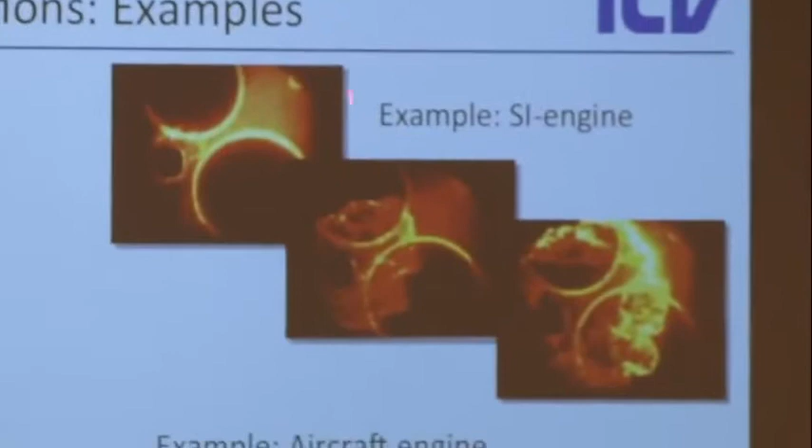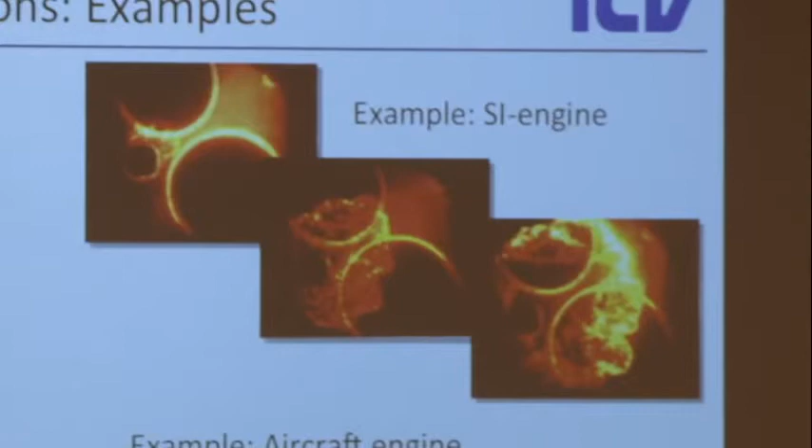You see the valves here, this is an internal combustion engine from the bottom through the piston. You look at the valves, then you have ignition, and you see a little flame kernel here that grows and just burns through the premixed charge. Another example would be a stationary gas turbine.

The other one is non-premixed combustion, where you inject the fuel, maybe in liquid or gaseous form, into an oxidizer like air or oxygen. It can only burn when it mixes, because the fuel itself doesn't burn and the air itself doesn't burn. So you have a mixing process going on with chemistry happening at the same time. A typical example is an aircraft engine, where liquid fuel, shown in green, comes in, evaporates, mixes with the air, and then burns.

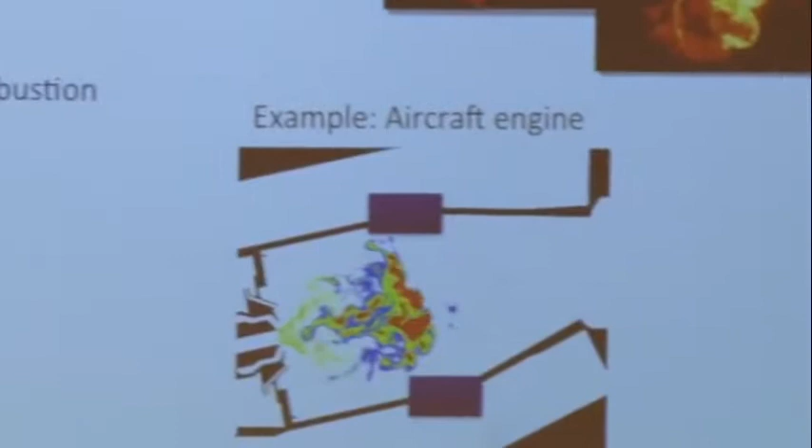The reason for this: in the spark ignition engine with premixed combustion, you have heat release very fast, and that gives good efficiency if you remember your thermodynamics course. Non-premixed combustion is very stable, it's very hard to blow out, and for an aircraft engine that's an important feature.

I want to show you how this looks like.

Unfortunately, I forgot to bring a cigarette lighter. Anyone have a cigarette lighter or matches? Good. I brought this thing here, which got me stuck at the airport. On the screen they have this thing, just in black, and they asked what it was. I said, I think it's an umbrella. They said, this is not an umbrella. So this I didn't bring, I got somebody to get this for me here.

Okay, good. I want to show you how a flame looks like.

Okay, so what do we have here? We should extinguish this. I have this tape here, and I forgot to bring fresh tape. Maybe I'll use my fingers, but then it gets awfully hot. So if I fall down and die, you should do something.

Okay, you see the nozzle is cold. It takes a while to start burning.

So now I do this, I close these holes here. Now you have just fuel, propane, coming out of this nozzle. The propane itself can't burn, it needs to mix with the air. As I said earlier, the mixing is quite slow. This is laminar here also, so mixing is very slow.

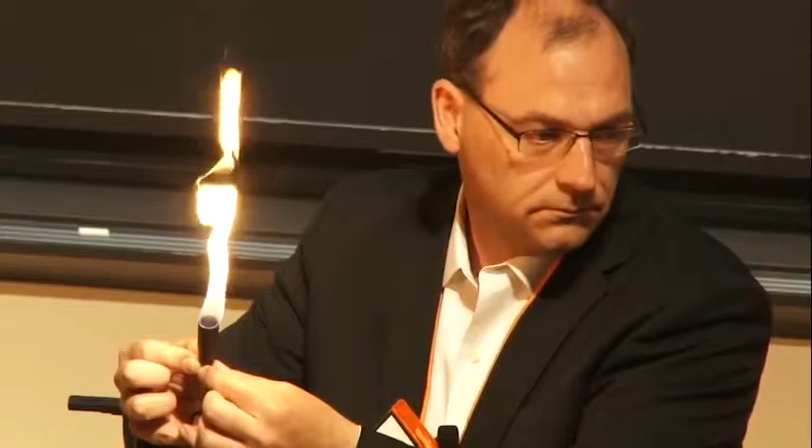No, I think it's okay. Good, or should we turn the light down? What's that? Oh, the blue. Yeah, okay, turn the light down.

So now it's all pre-mixed. You suck the air in here, it mixes with the fuel, and then, if you could turn this off here, then I could hold it in front of the blackboard. And then you see stuff coming out. First of all, you see this is not lazy anymore. This is a very vigorous flame, and it accomplishes all the heat release in a very, very small distance here.

Of course, in this case now, you also have the air that mixes in, so the total velocity coming out is much higher, it's turbulent, it mixes very fast, and you get a lot of heat release. So, the demonstration here is just, you do premixed, you do non-premixed, it's very, very different.

Exactly what we're looking at, we'll talk about later.

Thanks for the lighter, by the way. Get one of these cigarette lighters and look at it.

One thing that's very interesting, I'll focus again on this later on. You look at it, you have the same thing. It's cold on the inside, it's pure fuel. It's cold on the outside, it's pure air. It's hot only in a thin region in between where fuel and oxygen are just in the right amounts. And then what you have is a very thin flame.

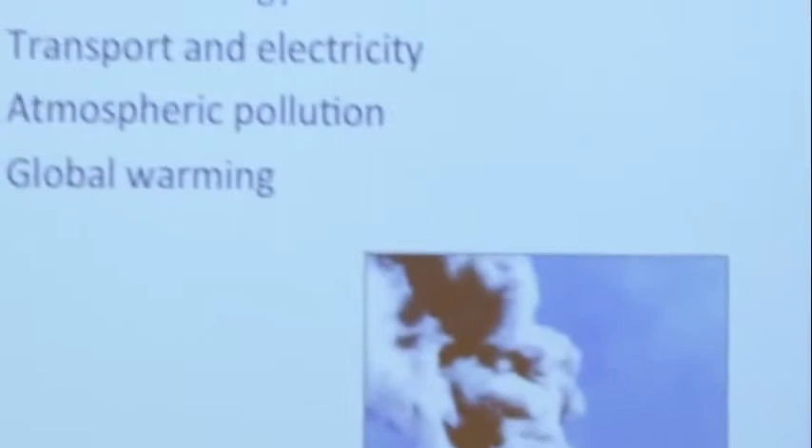Now, pollution, outside of just thinking of CO2, is still an important issue, and sometimes this is forgotten these days a little bit.

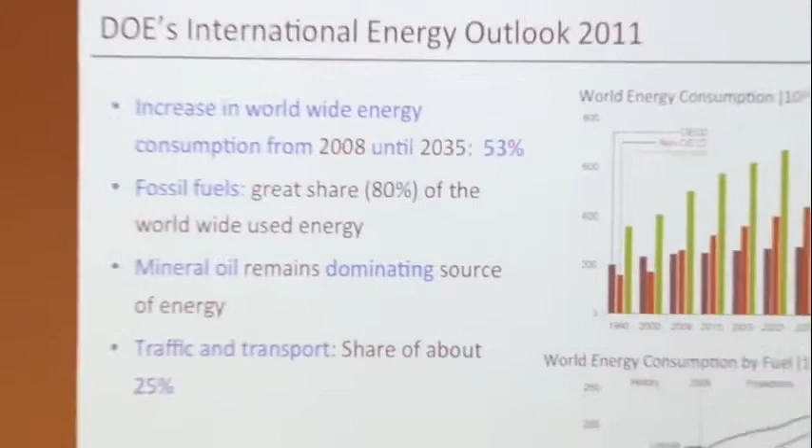These you have seen. This is an old graphic from the 2011 International Energy Outlook, but things haven't changed very much. What you see is that total demand for energy increases from 2008 to 2035 by 50%. This is a lot. OECD countries don't change very much. It's mostly non-OECD countries that are responsible for this, basically India and China. This is not to say that people there are bad, it's just that OECD countries already use so much energy that you don't need to increase it even more.

Demand is coming up in the next years, and oil is the dominating source of energy. Transport and traffic accounts for about 25%. You see this here is the world energy consumption, projected world energy consumption. Liquids here is oil basically, coal, natural gas, renewables, nuclear. Renewable is wind, water, solar, and all of this.

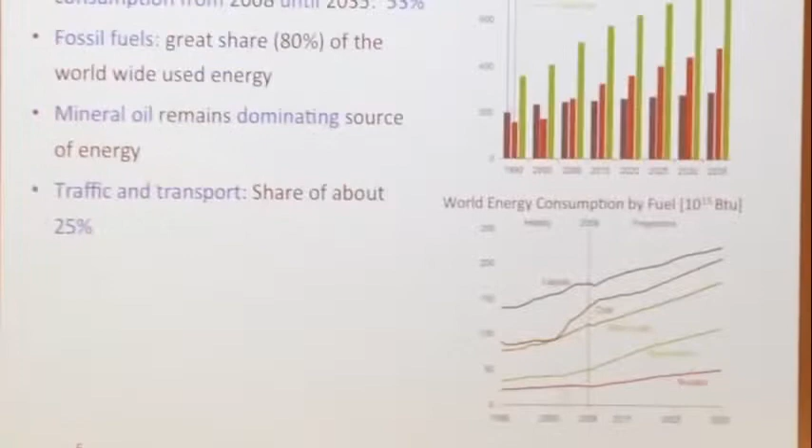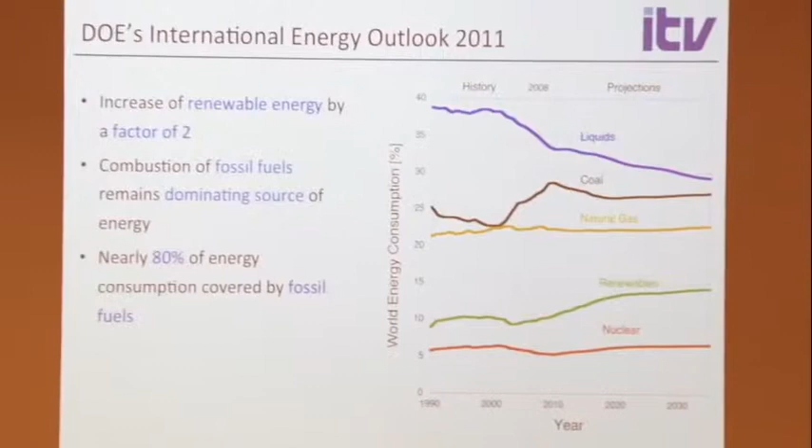So this is the exact same data, just absolute numbers. This here is in percent, and you see that the demand for liquids goes a little down. Coal stays roughly the same, and coal is particularly bad in terms of CO2, as you know. Natural gas stays about the same. Renewables, and that's important, will increase a little bit, but not very much—let's say a factor of 2 or so in the next 30 years. But a factor of 2 is not very much, it's not going to change how things are done.

You see, you have to add these up—these are all fossil fuels. If you take renewables and nuclear together, you end up at about 20% of the total share in 2035. Maybe the new reports are a little different, but that's the basic message. Nuclear here is even before Fukushima, so this might even be less at the end of the day.

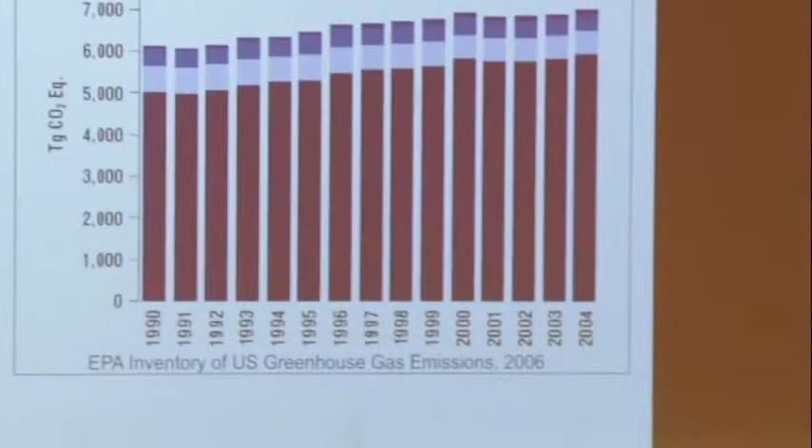So the message of this is we will need more energy. That energy will be supplied by burning fossil fuels. Now we can see, does that have anything to do with CO2, with global warming?

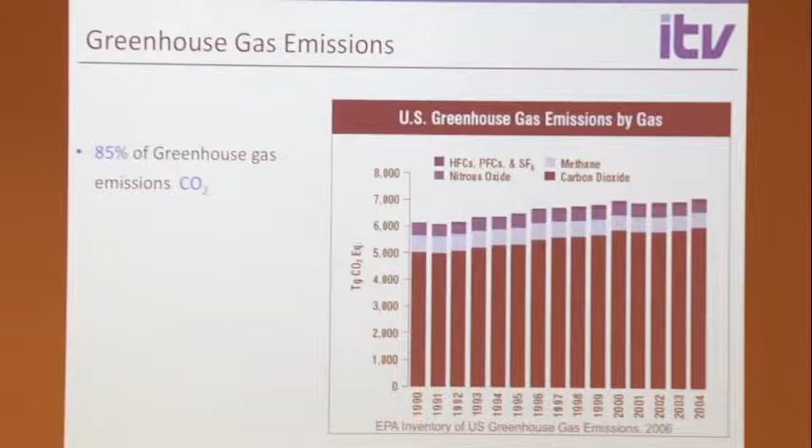Greenhouse gases—there are different greenhouse gases. You see nitrous oxide, methane, and most of all carbon dioxide. You can convert them all back to CO2 equivalent, and combustion, CO2 is responsible for about 85% of all the greenhouse gas emissions. So basically greenhouse gas emissions are mostly CO2.

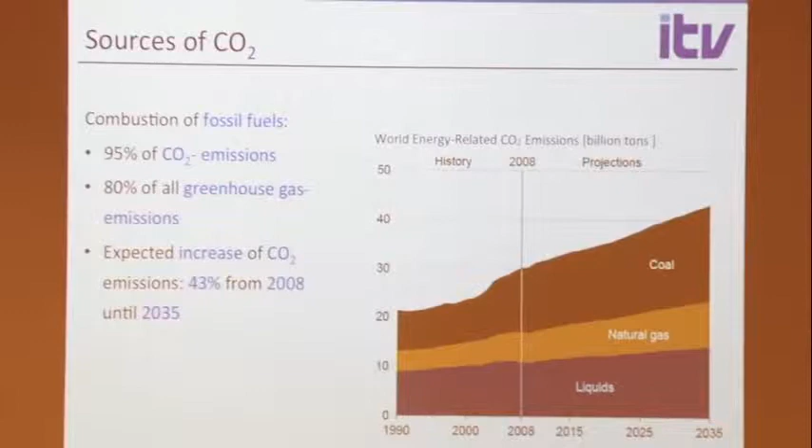Where does the CO2 come from? There are different sources of how we generate CO2 in the world. 95% of all of this is combustion, so combustion is responsible for 80% of all the greenhouse gas emissions. The expected increase in CO2 emissions is 43% again in this time span, because we use a lot more coal in that time, and again coal is particularly bad.

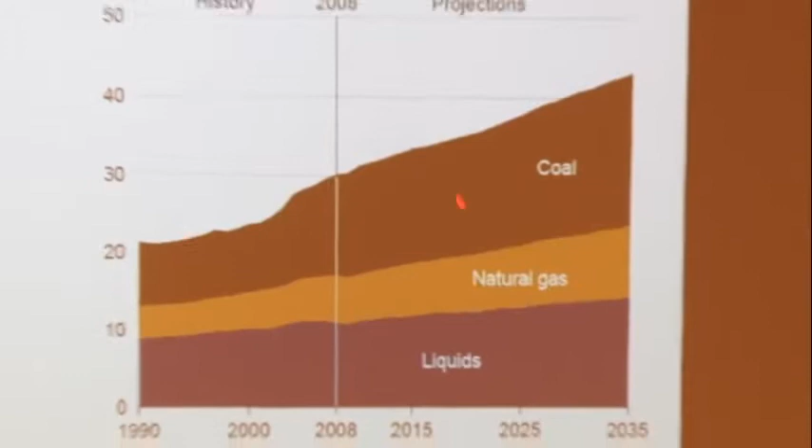So what can we do about this? There are different things. Maybe hydrogen economy, no CO2. CO2 sequestration, carbon capture and storage, is another alternative. The question is always how to collect the CO2 from combustion, but then where do you put it? You need to dig it into somebody's backyard, and that's an issue.

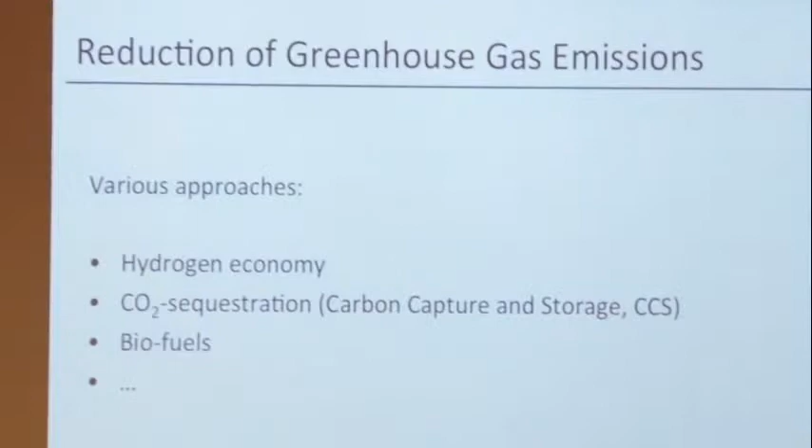Biofuels are another interesting alternative. The real problem with biofuels is there's not enough land to grow them. But what's very interesting about biofuels is that you can have even a negative CO2 balance.

You can, if you grow biofuels, burn them, and combine it with carbon capture and storage, have negative net CO2 emissions. You just take CO2 out of the environment. So these are things one could think about.

The point is there will not be a silver bullet, one thing that solves the whole problem. But there might be many little things. If you have one technology, say biofuels, that replaces 5% of energy demand, and you have 20 of these, then everything's good. Maybe 5% solar, 5% wind, 5% water. Add all these up, and maybe you get to 100% at some point.

Increasing efficiency is one important approach, and combustion theory can help with that — that's the point I wanted to make here. Increasing efficiency is not easy. You take a combustion device and want to increase efficiency, but you'll see there are other aspects you have to consider.

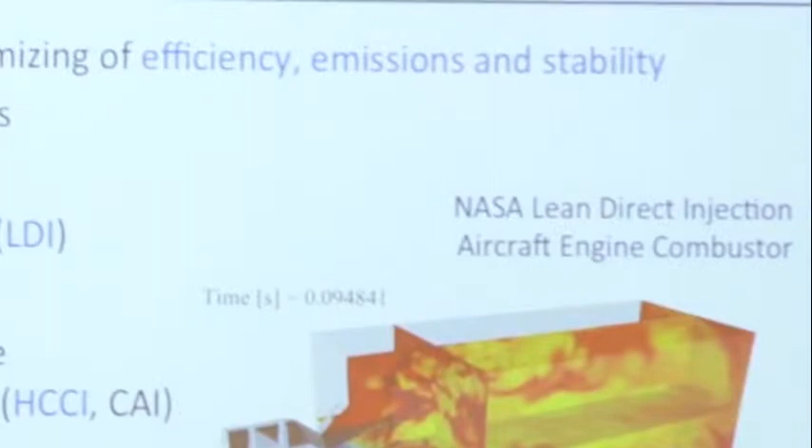Take a stationary gas turbine, for example. It's typically operated premixed and lean. If you go very, very lean, you reduce emissions, you reduce NOx, but the process becomes prone to instabilities.

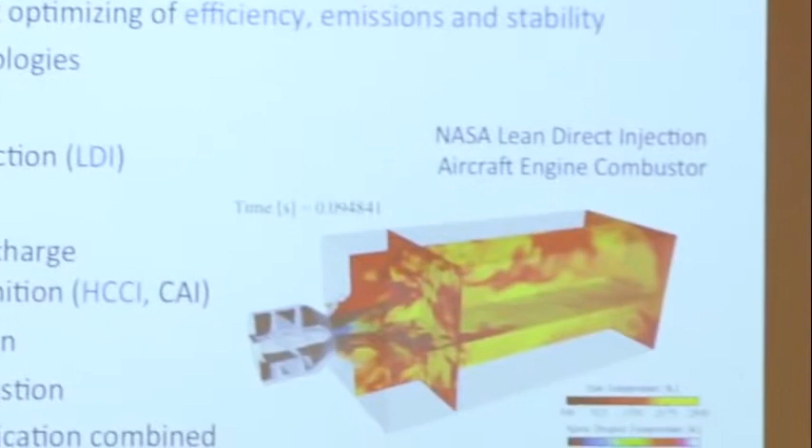Or take an aircraft engine — it's very stable, but since it's non-premixed, you have a lot of emissions. Comparably, if you want to go more premixed, you reduce emissions but lose stability. The same can be said about efficiency, where you can trade it off against stability.

For example, HCCI engines promise high efficiency and low emissions, but it's hard to design a really stable combustion process, and so on.

There are many new technologies. People sometimes say combustion is an old research field, and that's true — combustion research really started millions of years back, with Stone Age people trying to rub stones together, which didn't work, and then they took sticks, and it worked, or something. It started a long time back, but still every day you hear about new technologies. The problem is our current understanding isn't made for these new technologies — we need to learn something new.

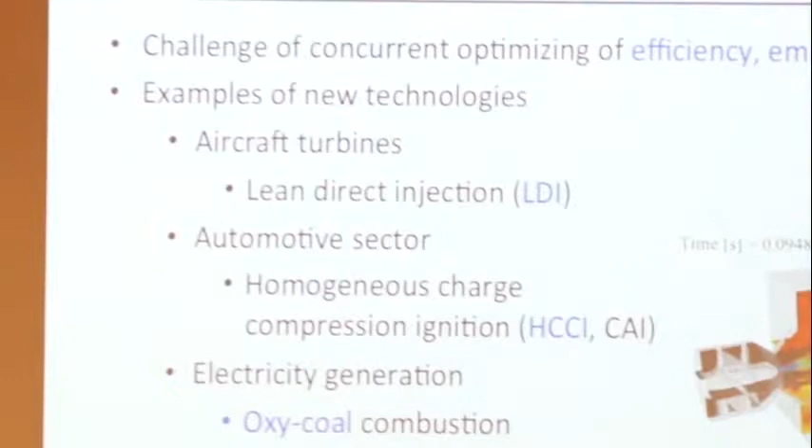Here's a list of examples. Aircraft engines, as I mentioned, are very stable but have a lot of emissions. NASA is working on a new concept called lean direct injection, trying to make things more pre-mixed, shown in this simulation — but that comes with issues of stability.

You have liquid fuel but still pre-mixed, so it's kind of a mixed combustion mode. In the automotive sector, people talk about HCCI — homogeneous charge compression ignition.

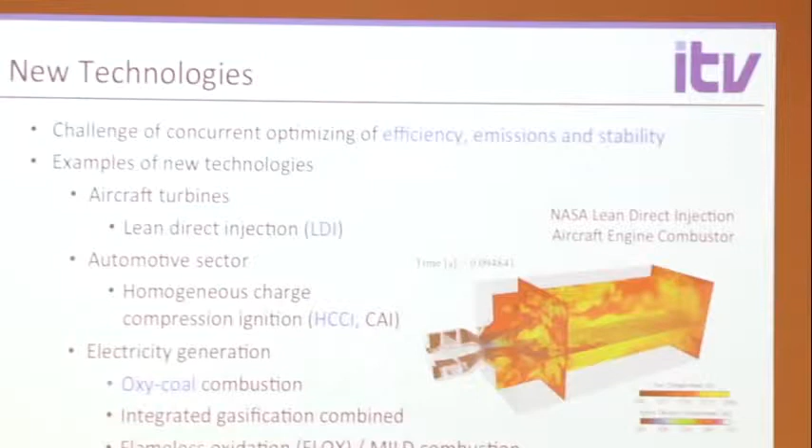In Europe, people talk more about so-called downsizing — making engines smaller and running them always at high load, which gives better efficiency for a typical engine since it's not throttled. But the problem is knock issues, so-called super knock, where you might get one knock event every 10,000 miles, but that one event will destroy the engine. So you can imagine this is very, very hard even to study experimentally.

So that's another good example of how theory can really help.

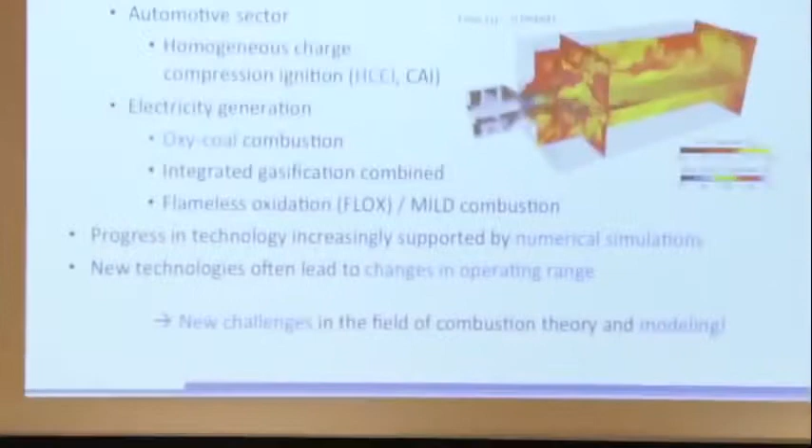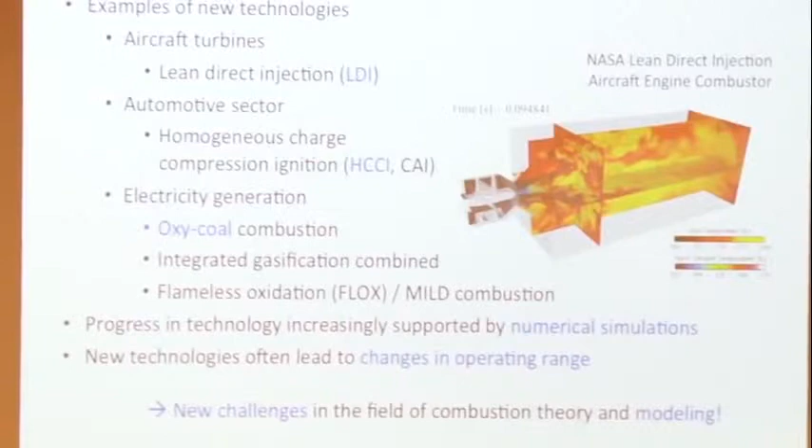In electricity generation, there's oxy-combustion, where you try to burn with pure oxygen instead of air. The advantage: if you burn carbon with pure oxygen, you get pure CO2 — or take coal, you get pure CO2 and water, condense the water out, and you have pure CO2 you can store underground. So oxy-combustion is for sequestration, or carbon capture and storage.

IGCC, flameless oxidation is another interesting technology where you burn at relatively low temperature. You don't get a flame even, you get more of a distributed combustion mode, almost no visible flame. And it has potential to get very low emissions of NOx and CO, and so on.

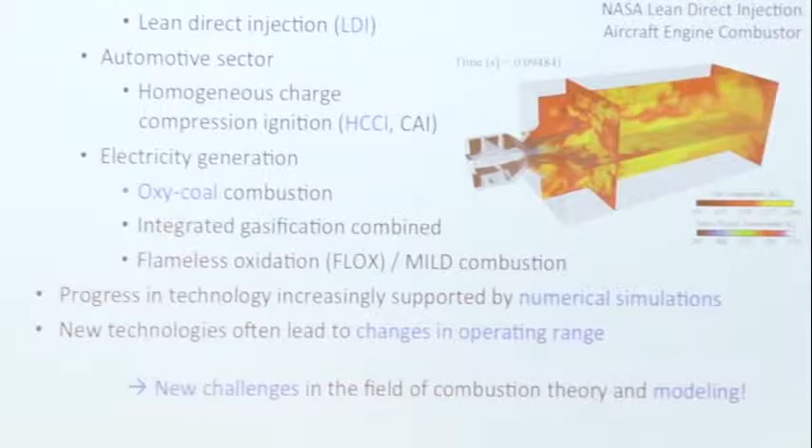The point I want to make is all of these might be outside of the typical combustion ranges. They're very, very different, maybe from that simple flame I just showed you. This means we need to develop new theories and a new understanding. Numerical simulation can help design new combustion technologies together with experiments. But if you want to simulate something you don't understand, that's a problem. So new challenges in combustion also prompt us to develop new simulation technologies, and also new theory and models.

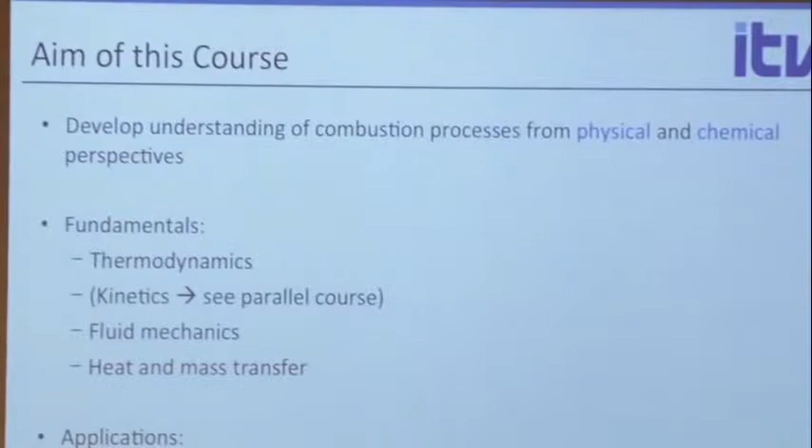So that was just a short introduction. The aim of this course is that I don't want to just give you recipes. We'll talk a lot about analysis, and some of the analysis we'll discuss was really done maybe in the 1930s. It's really old.

Does that still help us in any way? Yes, we'll see some things are right, some things are wrong. But at the end of the day, what I want is not recipes where you take one kilogram of fuel and I give you a recipe and you tell me how it burns. I want you to get a deep understanding of combustion. I want you, at the end of this course—maybe one week is too short—to feel, in your stomach, how all of this works, okay? So that's what we're trying to do.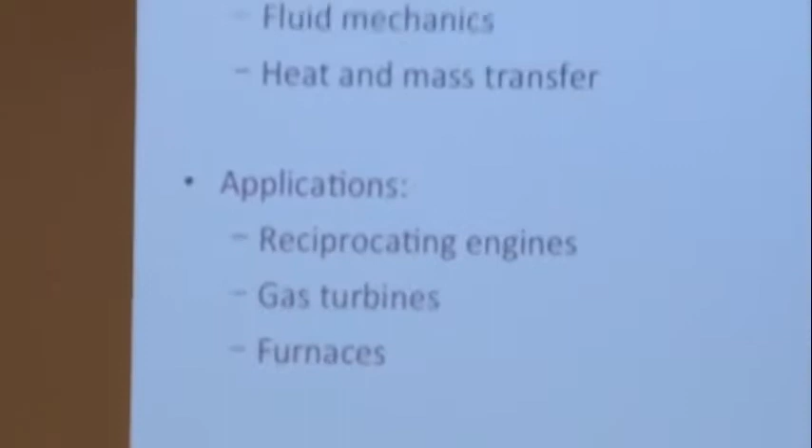Some of this stuff, as Professor Law also pointed out, is theoretical with lots of equations, but the course is called combustion theory after all, so there's at least no false advertising. But again, this is how you should look at it: don't look at it as needing to be able to redo this derivation. No. Sometime when you look at this, you should think, oh, maybe here I should use a similar trick, or whatever.

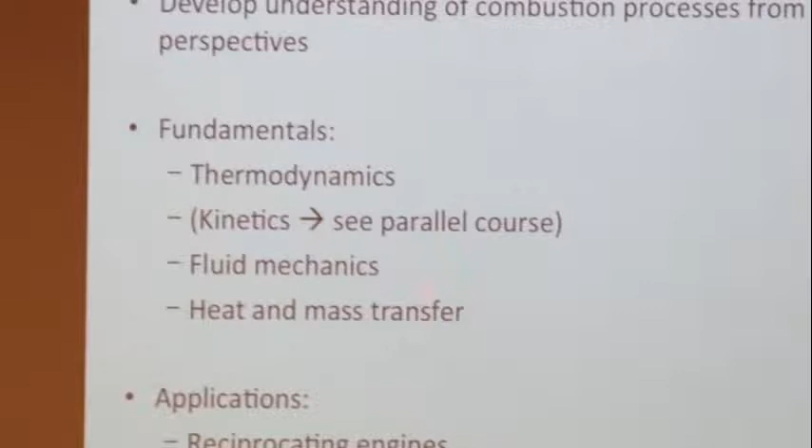Good. So fundamentals here: thermodynamics, we'll talk about thermodynamics. Kinetics, we will not talk about kinetics, because there's a parallel course in the afternoon taught by Professor Green, and he'll talk about kinetics, so we'll skip that part. Also homogeneous systems, we'll skip that here because he will cover explosion limits and all these things. Fluid mechanics, heat and mass transfer—we'll talk about turbulence here, for example, and so on.

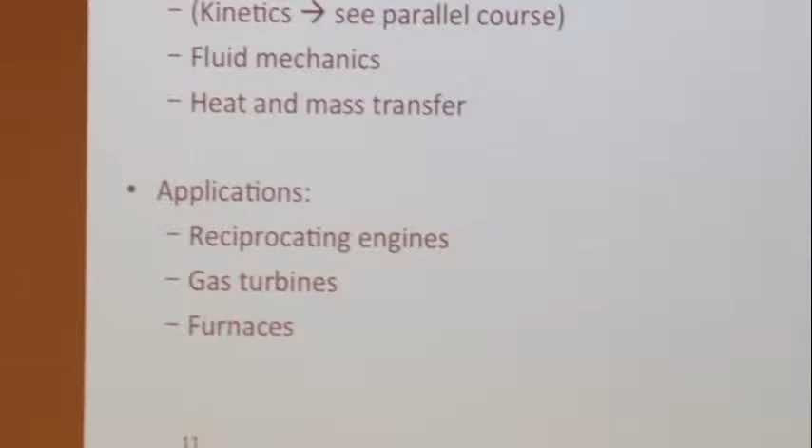And applications here, all applications you could imagine: technical systems, it could be just flames, but also internal combustion engines, gas turbines, stationary gas turbines, aircraft engines, furnaces, all of this. So really this course was developed from these notes here, combustion theory by Professor Peters.

He taught this course here six years ago, and in large part this follows his course. It's a little different from the Professor Peters course, but there is this book, which you can find online—I think it must be on the Princeton website somewhere. It has a lot of written text, and if you're interested, this might be interesting to look at.

I've subdivided this into two parts: one on fundamentals and laminar flames, and part two on turbulent combustion. Part one, we'll talk about some fundamentals—you've seen this many times, and I will try to go through it quickly. Then we'll talk about thermodynamics. The first law will tell us something about flame temperature. The second law of thermodynamics will tell us something about equilibrium.

There's a whole chapter on governing equations—we'll skip that entirely, you have it in your handouts. If you need to understand this a little better, look at your handouts. I think the one thing that's sometimes a little confusing in the governing equations, or important to see, is the energy equation. As you know, you can write the energy equation in 25 different forms, especially when you have chemical reactions going on. So getting your energy equation straight might be a good thing to do, but everything else should be straightforward.

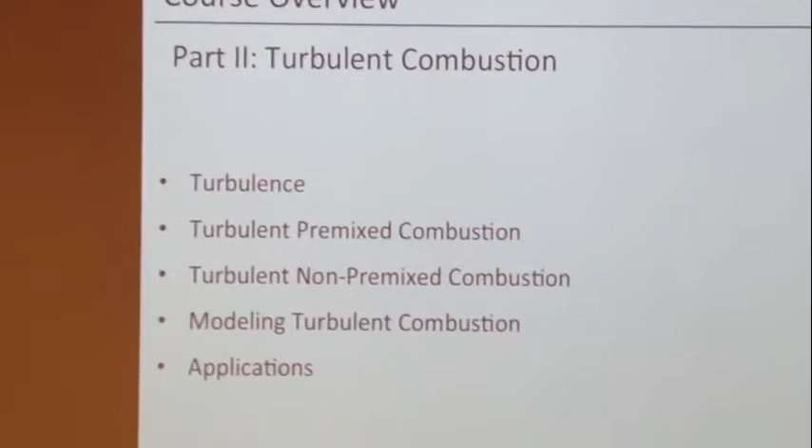And then we'll have a section on laminar diffusion flames. In the second part, we'll talk about turbulent combustion, so there's an introduction here to turbulence for those who haven't taken a turbulence course yet. It's very short. Actually, I teach a turbulence course also as a whole semester, so I'll try to do this here in an hour or whatever. Let's see how that goes.

And then we'll talk about the physics of premixed combustion. We talk about the physics a little bit about non-premixed combustion, and then there's one section on modeling both of these, first premixed and then non-premixed, and then application at the end. But I try to have some applications also on the way.

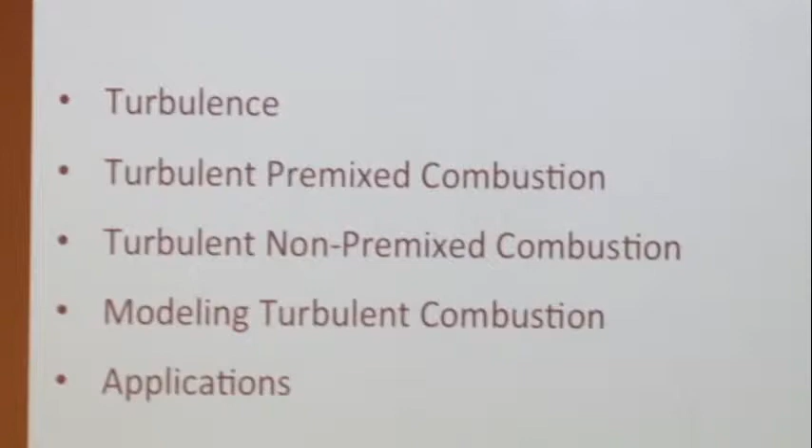Okay, good, one more thing. Everyone knows World Cup's going on. Who's interested in the soccer World Cup? Who's not interested? Okay. Americans, how many Americans do we have here? This was bad last night. What was this, 5th minute in overtime? This was for beating Portugal. That's not bad, almost made it. Any Portuguese here? No. We had a conference last week in Germany, and we had 2 people from Portugal there. We watched the game Germany-Portugal together. It was bad for the Portuguese, but there was a lot of beer also.

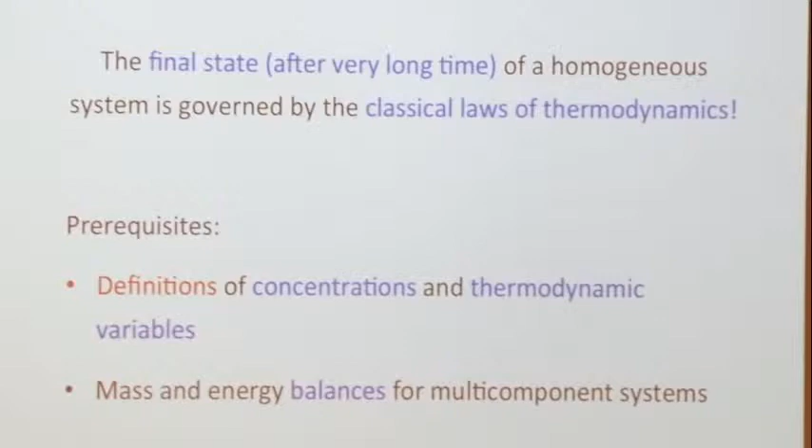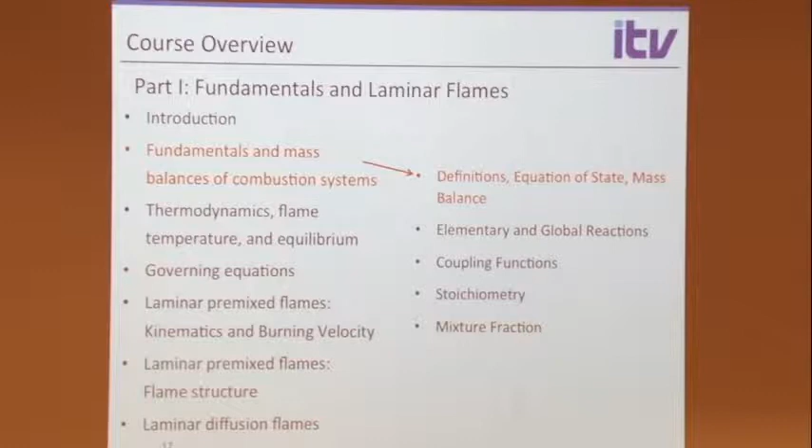So this here is this chart, you'll see it all over your handouts and your script. You always see this, so it's part one. I put these in so you always know where we are, where we're going. So this is part one. We are right now in the section on fundamentals and mass balances. In this section we have several subsections, and this is where we are now. So next we'll talk about this, and then move to the next section. This is just for your orientation in this course.

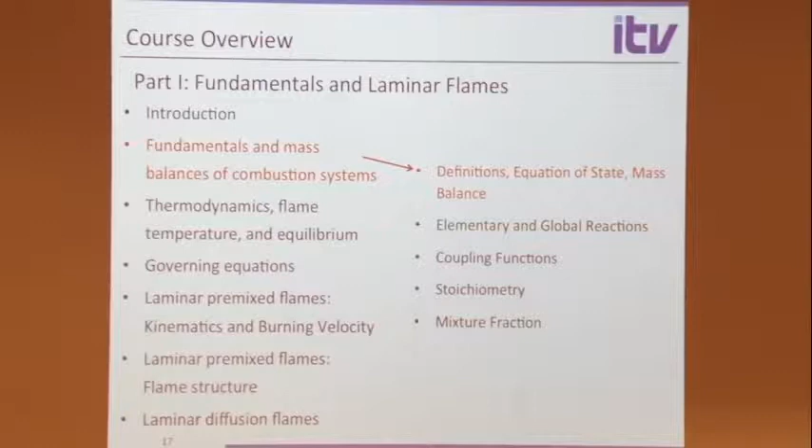So we'll talk about some definitions, the difference between elementary and global reactions. Again, we don't talk much about kinetics, but we will a little bit, especially when we talk about laminar premixed flames or flame structure. Then we'll talk about coupling functions - this is the most important thing I'll tell you today. And stoichiometry, mixture fraction - these are just basically definitions again.

So, in chemical reactions, mass is conserved. Mass doesn't change over chemical reactions. Elements are conserved. If you have methane, you have one carbon. You burn it to CO2 and water, you still have one carbon. In typical combustion, you don't generate or consume elements. That's very important, we should keep that in mind.

Combustion typically deals with mixtures of usually gases. We talk about mixtures because if you want two things to react, they have to be somehow together. I mean, you can also have surface reactions and so on, but here we typically talk about mixtures, and we talk about gas mixtures.

So, think back about your first thermodynamics course. You talk about many things, internal energy and enthalpy and all these things. In that first thermodynamics course, you talk about it for a single component system. One of the big differences here is we always have many species, mixtures, so that makes things a little more complicated in terms of notation, but not too much in terms of thinking about it. The same laws of thermodynamics still apply.

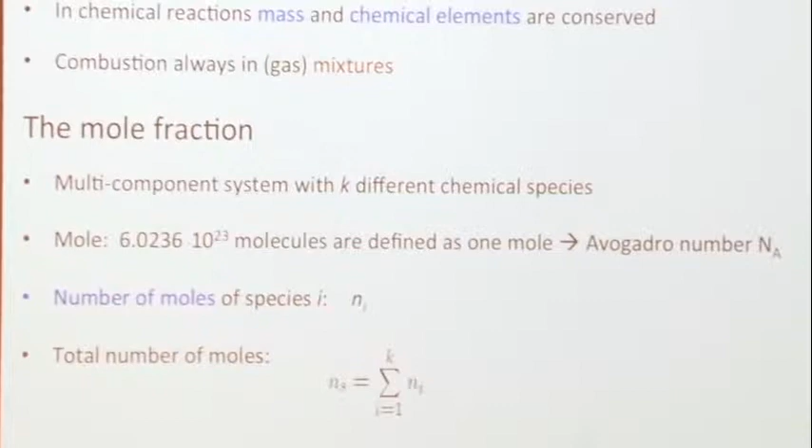One of the things we always need to do is know how much of each gas we have in our gas mixture, and for that we often use the mole fraction. The definition is just the number of moles of one particular species divided by the total number of moles of all species, and you get the mole fraction.

I guess everyone knows these things, it's just for repeating. You can convert mass to mole number using the molecular weight of a particular species. You can also define a fraction in terms of mass: take the mass of one species in a mixture divided by the total mass, and you get the mass fraction.

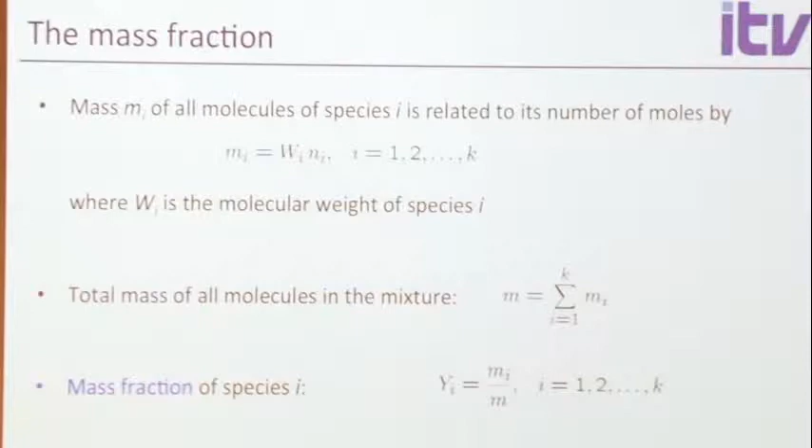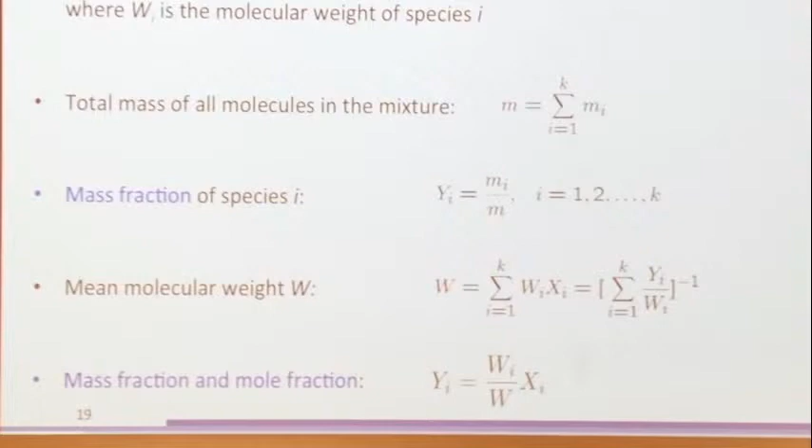You can convert mass fraction to mole fraction. Using mass or mole fraction, you can compute the mixture molecular weight, or mean molecular weight of a mixture. Now one should ask, why can't we stick with just one of these? Why is everything always molar and mass-based? Think about it, we'll come back to that question later.

Another thing very useful in combustion, which you might not have seen in your thermodynamics course, is element mass fractions - the mass fraction of an element. Take a mixture of methane and air: you can have a mass fraction of methane, but you can also look at the mass of all the carbon atoms compared to the total mass, or the mass of all the H atoms compared to the total. It's relatively simple to do that.

The reason this is very useful is that elements are conserved. The methane will be converted to CO2, but the carbon just stays carbon. So conserved quantities are always very good in combustion research.

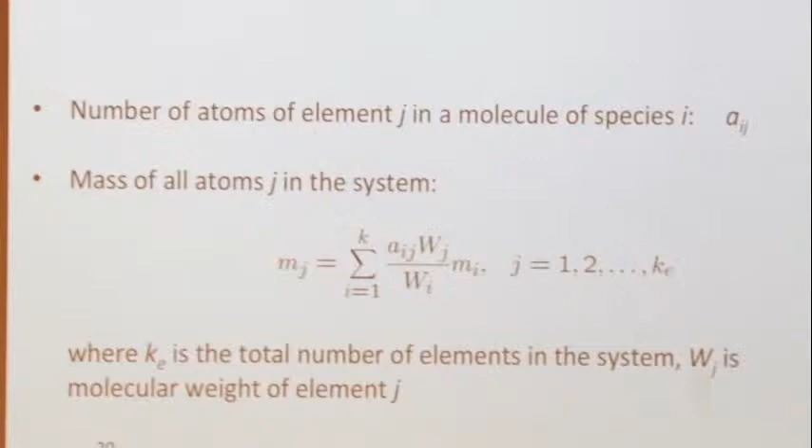Using the molecular weight of the element, I convert it back to mass, giving the total mass. Sum this over all species to get the total mass - a trivial relation. Dividing by the total mass gives the element mass fraction, expressed either in terms of mass fractions or mole fractions. We use these once in a while.

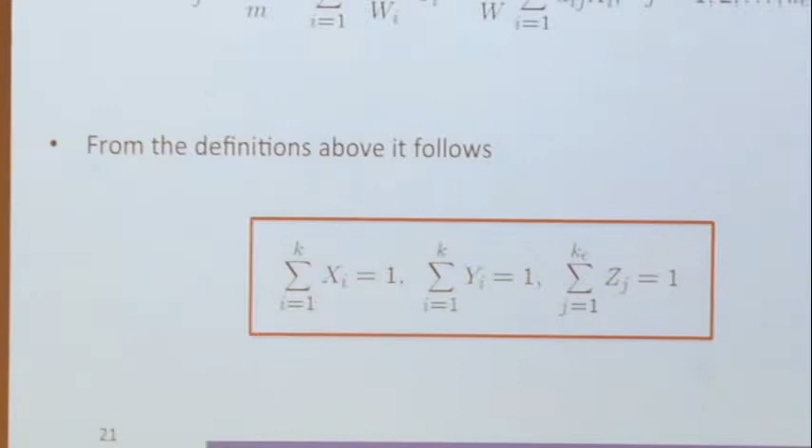What's interesting is that because of the definitions, they're all based on the total mole number, mass, or element mass, so all of these always add up to 1. If I sum the mole fractions of all species, it sums to 1; same for mass fraction and element mass fractions.

So again, why do we use mole fraction, mass fraction, and element mass fraction at the same time? Any ideas? Why don't we just stick with mass fraction to make life easier? Do you need to generate additional equations to solve for more things? Yes, but more precisely, why? What's the advantage - if we use both, each must have an advantage. What's the advantage of mass fraction?

The mass is conserved - that's very good. In combustion, species always disappear and are formed; our equations have a chemical source term that makes life very complicated. Anything conserved doesn't have a chemical source term and doesn't depend on chemistry - that's always good. Mass is conserved, so mostly when we write conservation equations for a combustion process, we use mass fractions because mass is conserved, which makes the equations simpler. Also think about it - why would we use mole fractions or moles?

Chemical reactions are always written in terms of moles. For example, one CH4 plus 2O2 goes to products. It's always written in terms of moles.

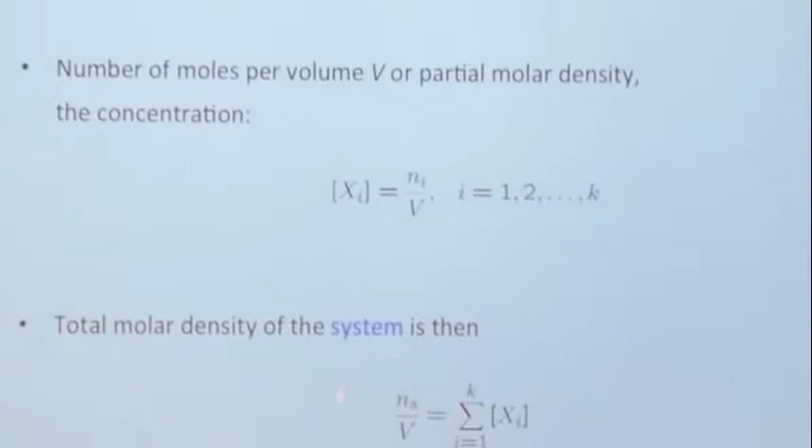Because chemical reaction rates are usually specified in terms of concentration of species. So a reaction rate is the rate coefficient, which has the Arrhenius factor and so on, times the concentration of the reactants. This would be the total concentration, but the total concentration of a system is not equal to 1. It's just the total number of moles divided by the volume. It's not 1 because it's not dimensionless. All of these are non-dimensional, this is not.

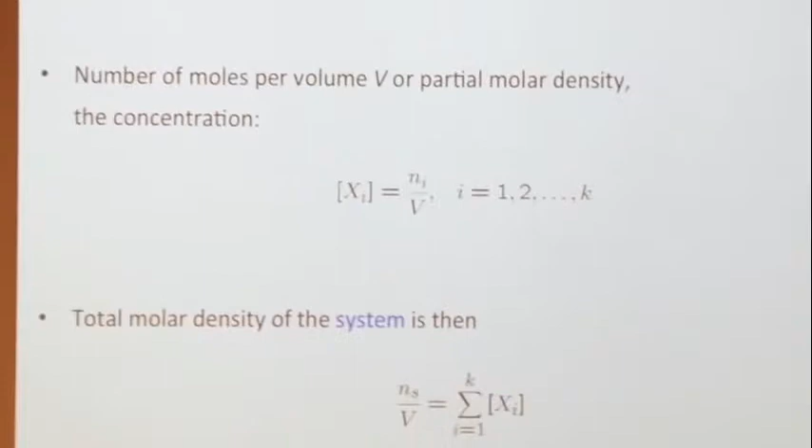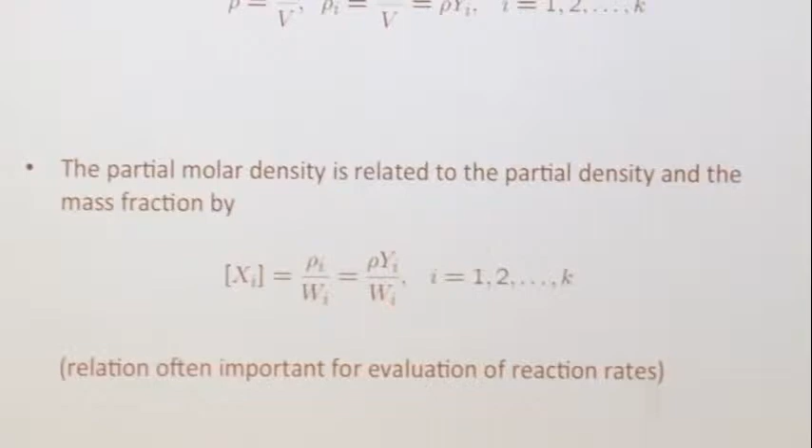The density here is just the mass divided by the volume. We have a partial density here which is also used to define the mass fraction, and these can be converted into each other. So if we look at a reaction rate, very often we use this relation because reaction rates are written in terms of concentrations, but our equations are typically written in terms of mass fraction. So very often we write the reaction rate in terms of this expression: rho times y divided by wi is something you always see in reaction rates, and this is where it comes from.

Gas equation of state. Everyone knows this, we don't need to introduce it here. In combustion, mostly the ideal gas equation of state can be used, the equation for thermally ideal gases.

Even for high pressure, in engines, this is typically a good assumption once the fuel's evaporated, because not just the pressure is high, also the temperature is typically high, except when you look at rockets or something like this, then you do have to think about real gas effects. But otherwise, mostly you don't. So that's one thing that makes life a little easier.

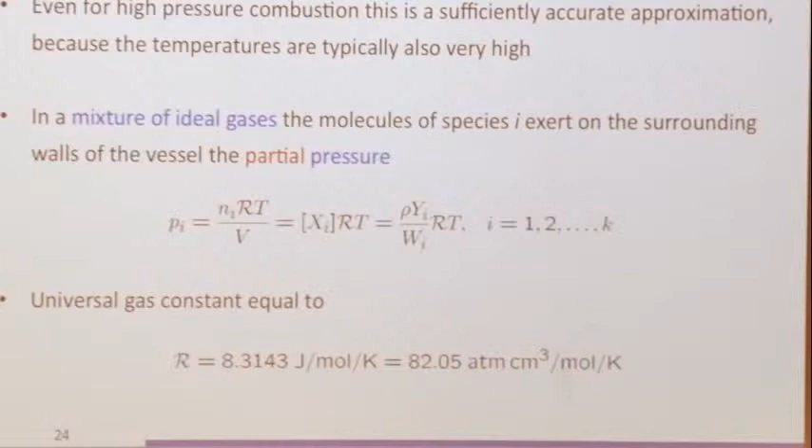Of course, I can write this gas equation of state for the partial pressure. There's this Dalton's law, which says if I have a mixture of different gases, then each gas, for an ideal gas, behaves like it was alone. That makes perfect sense in the limit of ideal gases.

So this means in this room, you have nitrogen and oxygen mostly. The nitrogen, just by itself, behaves like there's no oxygen, because the molecules bump against the wall, there's a pressure it exerts on the wall, and the oxygen also has a pressure to the wall or anything else. These two pressures just add up because they're independent. You can superpose these, that's what Dalton's law says. The total pressure is just the sum of all the partial pressures, and each single molecule takes the full space as if it was alone.

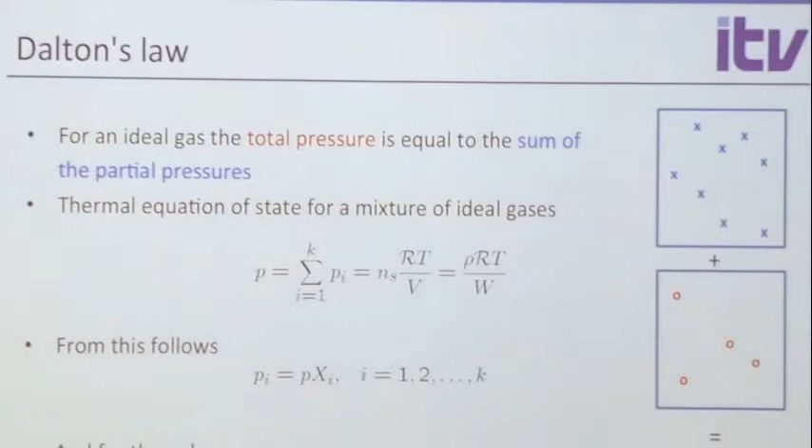So this is why you can write the volume. The volume can be computed from the mole number of any particular species and its partial pressure. As an example here, this is another thing I want to show you.

There are more slides in your handouts than we talk about. Some examples, sometimes a lengthy derivation, sometimes something I just took out because we don't have infinite time, and I just left it there. It was something we don't need later on, but I left it there in case you want to look at it. I try to always mark these with something green, if it's in your handouts, it's now hard to see. That's unfortunate, I should do something else, maybe put a little star there.

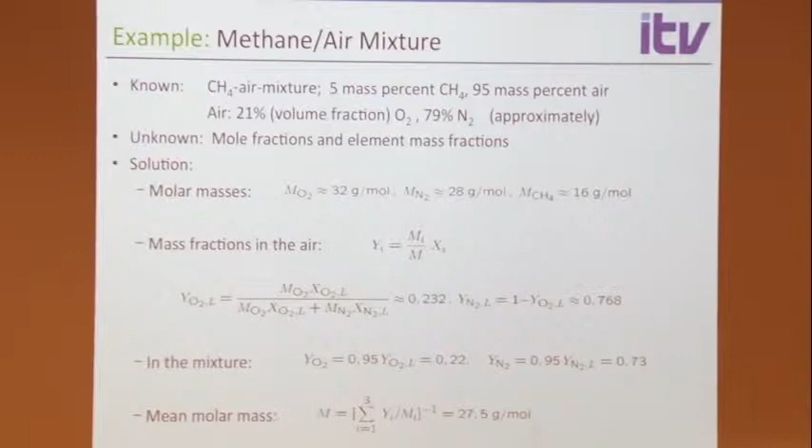Okay, so this was a lot of definitions. Let's talk about reactions.

We distinguish between elementary reactions and global reactions. This is just now a definition of the terms.

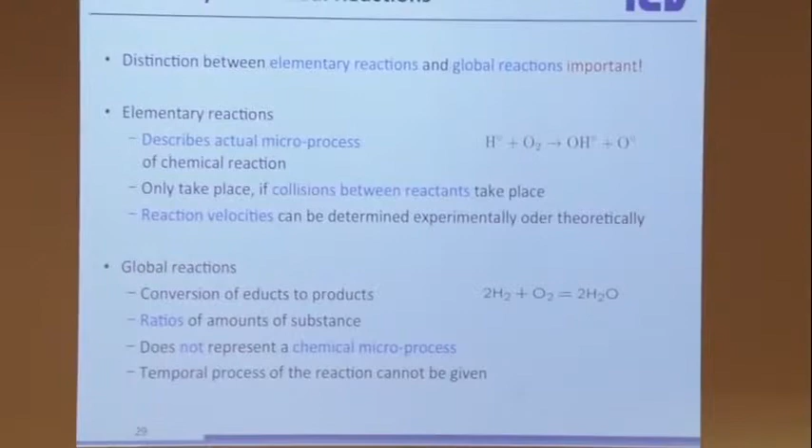Elementary reaction describes an actual microprocess. I mentioned this earlier when you talk about real kinetics. You have an oxygen and a nitrogen in the air, and they might bump together, and while they do that, you might form a third species, something else. These are actual microprocesses that happen. They take place if a collision between two reactants takes place.

These can be assigned reaction velocities, reaction rates, or rate coefficients, which you can measure for this particular reaction experimentally or theoretically. That's an elementary reaction. This is an example here. This, by the way, is the most important reaction in combustion.

You might as well memorize it now. You see it has radicals here. We denote the radicals with a little circle. It's not a general convention, that's just what we do, to help students in the beginning who are new to reaction kinetics see a bit what the difference is. Keep in mind, other people might not understand it. It's just here to help the students a little bit. I think everyone will understand it, but anyways.

Okay, so this is how we write an elementary reaction: H plus O2 goes to, with this arrow, OH plus O.

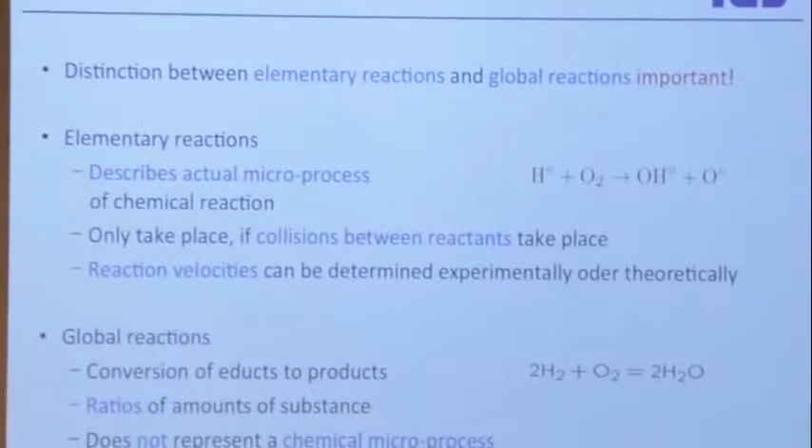So, elementary reaction, global reaction. You see the global reaction we write with an equal sign, to distinguish the two and to make clear that this is a real reaction as it happens in real life, versus a global balance of the amounts that would react with each other.

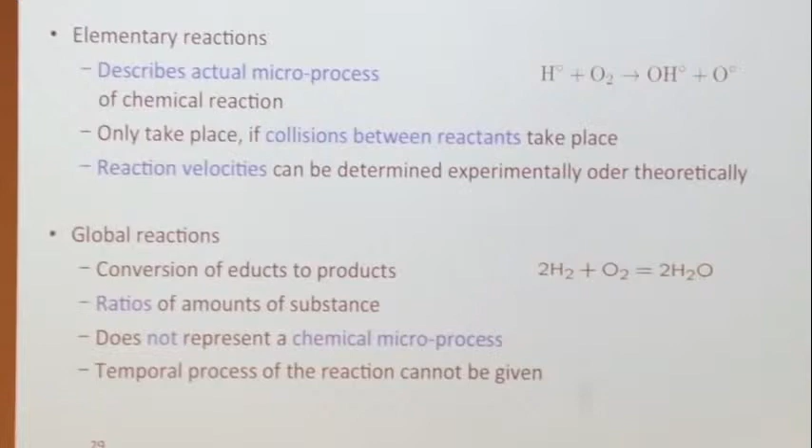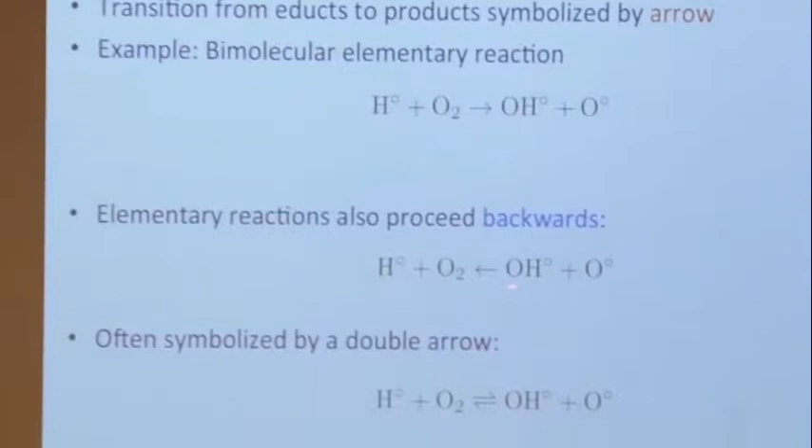So in a little more detail, elementary reactions observe conservation of elements. They happen due to collisions. This here is an example of a bimolecular reaction. Elementary reactions also always proceed in the reverse direction. If you take a chemical mechanism, sometimes in a combustion mechanism you download from the internet or find in a publication, some reactions are written to go only in one direction, but this is only because the other direction was neglected. In real life, all reactions always go both ways, which is sometimes symbolized with this double arrow, left and right.

Now, global reactions also observe conservation of elements, of course. So the most important thing here is to count elements on the left and right and make sure you have the same on both sides. They don't take place on the atomic scale in this way, they just give a global balance, which is why we use the equality sign. So this example here again for this reaction.

One thing that works with global reactions, which does not work with elementary reactions, is that since global reactions only give you the ratio of the amounts that react with each other, you can multiply them by a constant. So here we have 2H2 and so on.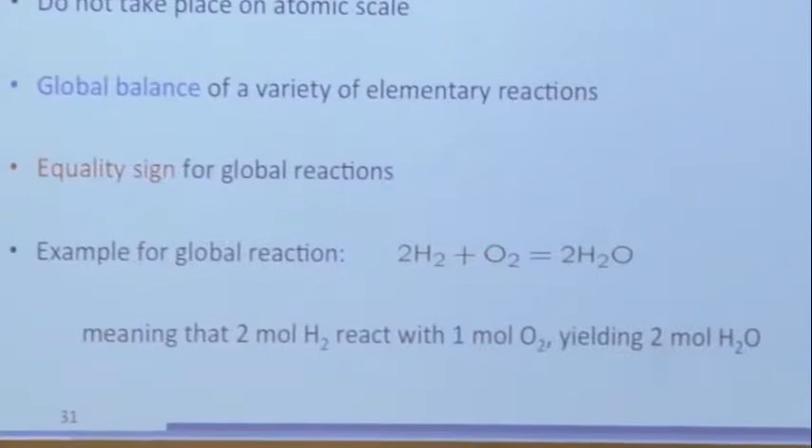I can divide this by 2, and I get this here: H2 plus 1/2 O2 goes to H2O.

With elementary reactions, this does not work. Take this reaction again, H plus O2 goes to this. This does not mean 2H plus 2O2 go to something, because for an elementary reaction, 2H plus 2O2 would mean that 2 hydrogen atoms and 2 oxygen molecules would come together at one point and magically form these reaction products. That doesn't happen. What you have is one hydrogen atom and one oxygen molecule. They come together, form some activated complex, and fall apart into an OH and an O, and that's just what happens. So this works here.

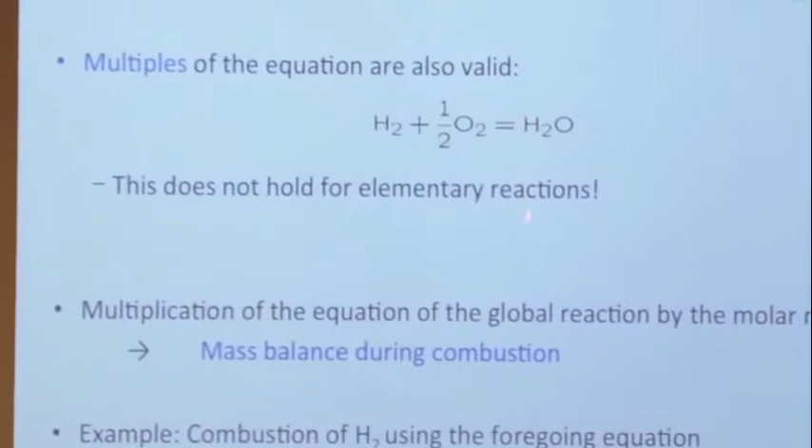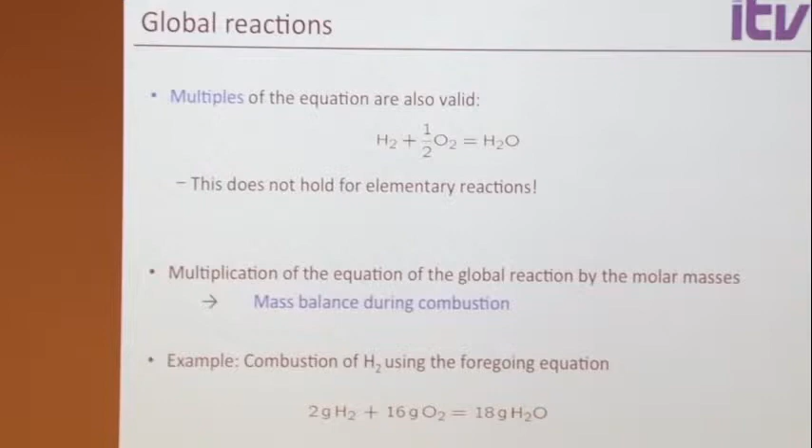I can also make mass balances using molecular weights. So if I have 1 hydrogen, let's say that's 2 grams, equivalent to 2 grams of hydrogen, or 1 mole of hydrogen, 2 grams of hydrogen. 1/2 O2 would be 16 grams of O2, and so on. So you can write this here. By using molecular weights, you can also write this in terms of mass.

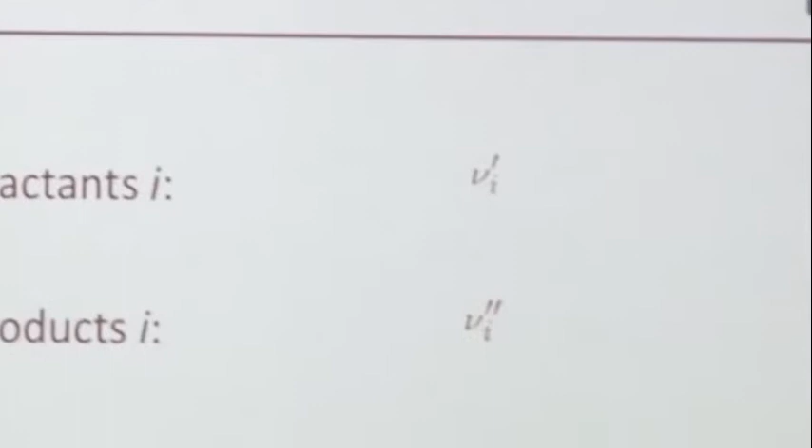This again is just convention for us. Nu here would be a stoichiometric coefficient in a reaction. Nu prime means it's the stoichiometric coefficient of a reactant. Double prime means that of a product. Both are always positive, always larger than 0. But sometimes we can also write it so that nu is nu double prime minus nu prime, which just means it would be positive for a product and negative for a reactant. That's very helpful if you do linear algebra.

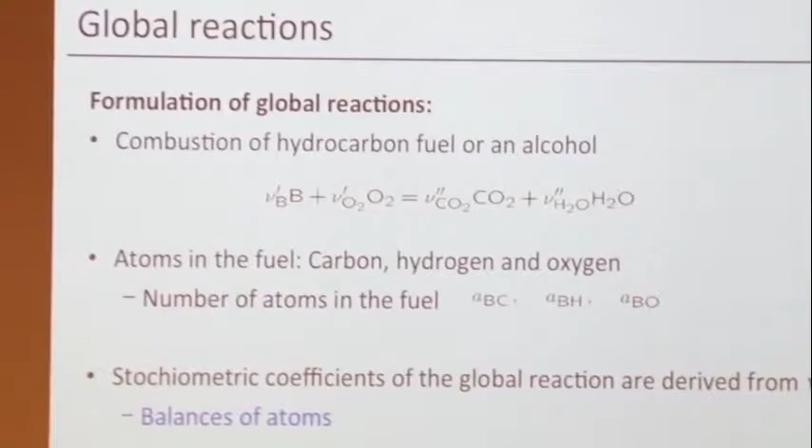This is how you formulate a global reaction. My children have done this in high school, so I expect you know this. I do oral exams in combustion, and sometimes the outcome is not very good. But one thing everyone always knows is how to form a global reaction. So if you don't know this, you should look at the slide later on.

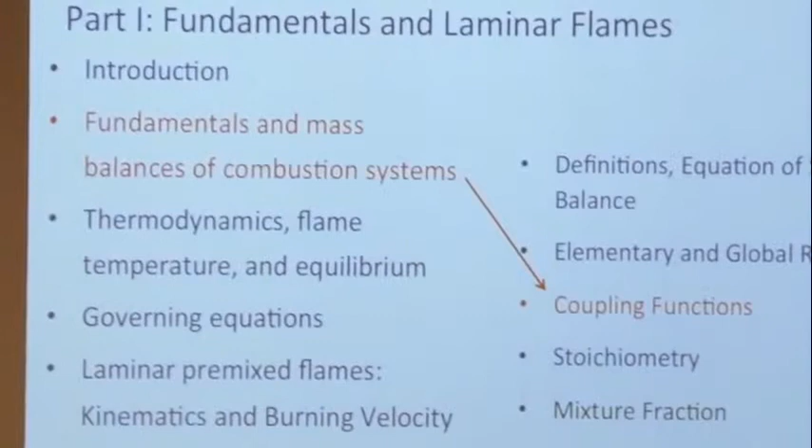Coupling functions. I said earlier this is the most important thing we'll do here today. Coupling functions are tremendously important in combustion. You want to describe a combustion system—let's say you burn diesel fuel, or kerosene, or whatever. Sometimes in simulation or modeling, we want to replace that real fuel with something simpler so you can compute it. Dodecane would be a good candidate for this, maybe as a surrogate, a simple surrogate for something. Or heptane is often used as a surrogate for diesel. Heptane, a chemical mechanism, has about 500 species or so.

Then a reduced mechanism has 150 species, but that still gives you 150 equations. So what coupling functions try to do—and they're all reactive equations—is reduce this number. They try to make the number of individual equations smaller by coupling different species to each other. This is a trivial concept. It's really simple, very easy. You will see it's very easy to understand, but it's very, very powerful.

Okay, I'll give you a second—gather your thoughts. Good, ready for coupling functions.

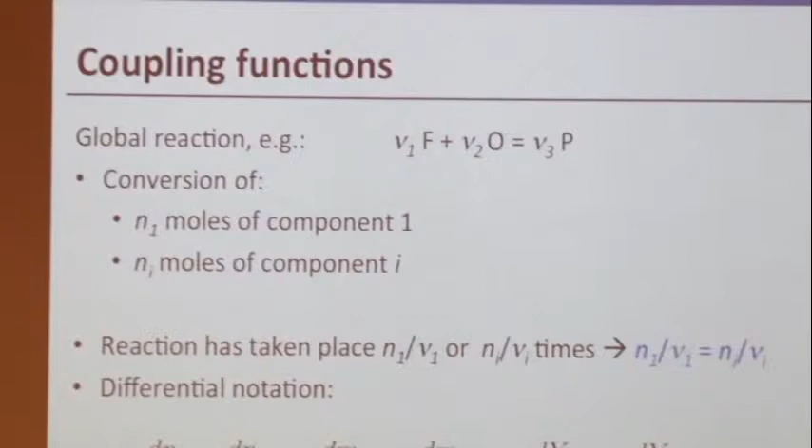It's very simple again. Let's say you have a reaction like this: nu moles of fuel react with nu moles of an oxidizer to give nu moles of product. Or just say A plus B goes to C, but remember the stoichiometric coefficients. Let's say this is one of these global reactions, a net reaction. Then it just means any time—so we have 3 species, which means we need 3 different equations to describe this problem somehow.

So we have 3 different equations for mass fractions. Now, mass fractions add up to 1, which means we can skip one, and say the mass fraction of product is 1 minus the mass fraction of fuel minus the mass fraction of oxidizer. We still have 2. But now it's interesting to realize that anytime you consume an F, you will also consume some O.

If you consume 1 mole of F, you will consume 2 moles of O. That couples these two species to each other. That's basically the general concept that the coupling functions use.

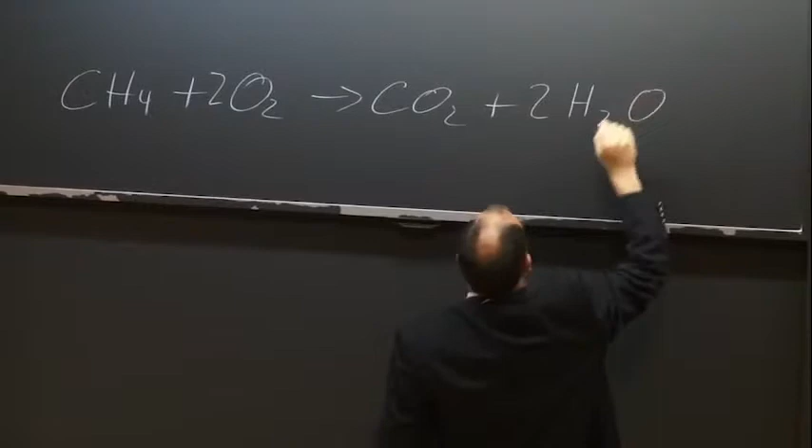So let's take a reaction: CH4 plus 2O2 goes to CO2 plus 2H2O. Take that reaction, and now let's say I look at what I have in my box. I have 5 moles of CH4, or 5 molecules, and I have 10 O2 molecules in my box.

The stoichiometry should work out fine, and now I let it react. A certain time later, I do a measurement. I measure 3 methane molecules in my box. I've consumed 2. How many times has the reaction taken place?

Trivial question—I shouldn't say trivial, because nobody answers trivial questions, there's always a little danger, like a 1% chance you're off. I need brave people here. You are already brave because you're in combustion science, one of the toughest subjects in the world, so you've demonstrated you're brave already.

So I had 5, now I measure 3. How many times has the reaction occurred? Very good, twice. Now say I had 10 O2, and now I measure 6 O2—no, let's say I had 10, now I measure 4. How often has the reaction occurred?

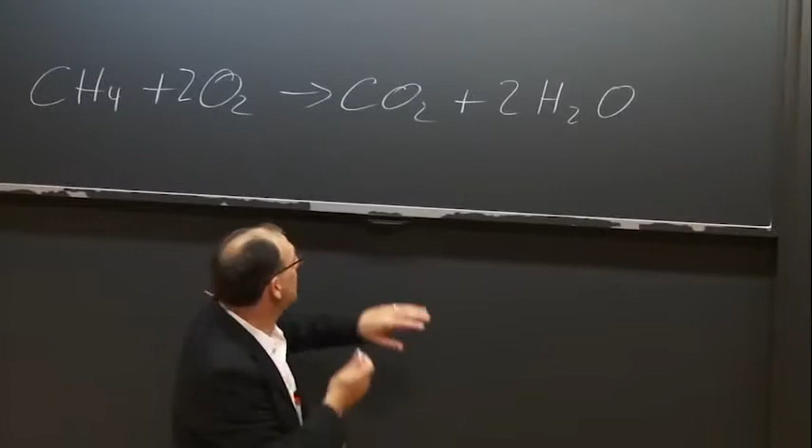3 times, okay? How did you do this? You took the change, dN, and divided it by the stoichiometric coefficient. I said the change was 2, divided by 1 is still 2. Here I said the change was 6, you divide by 2 and get 3.

Very simple. What's most interesting is that this ratio, delta n divided by nu, is the same for all species. In my second example, I measure 3 CO2: 3 divided by 1 is 3. I measure 6 H2O: 6 divided by 2 gives you 3. It makes perfect sense.

That's it, that's the coupling function. We just say dN_i divided by nu_i is the same for all species in the reaction, so that's the same as dN1 by nu1. Species 1 could be the fuel or it could be anything else. I can write this in terms of mass also, by dividing by molecular weight.

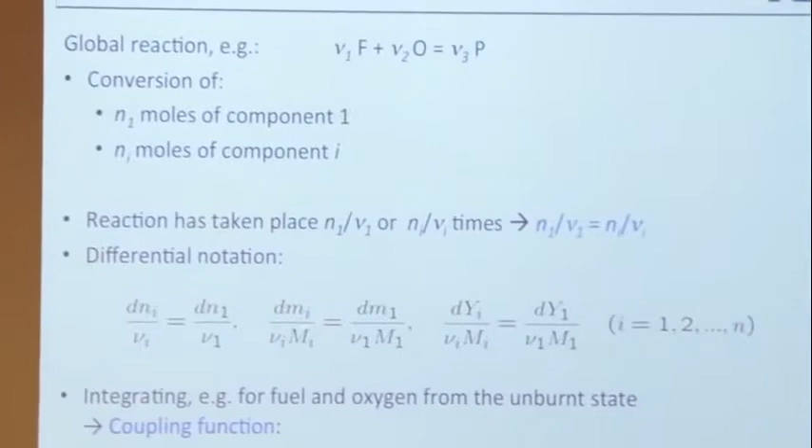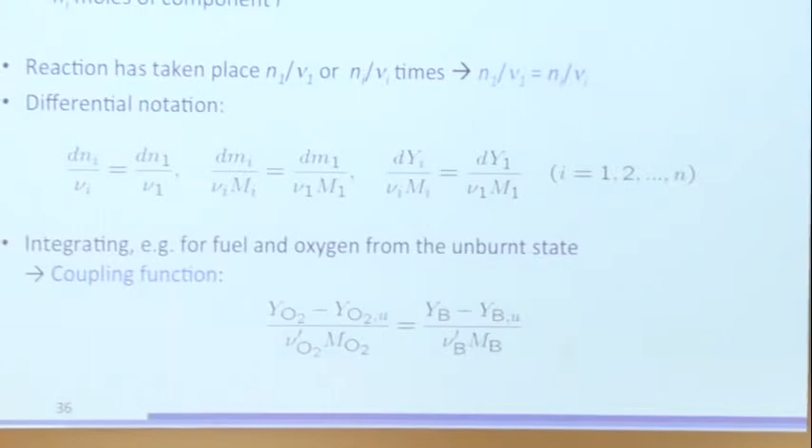You will see this throughout this course. Some of these slides I updated this time to make them more readable. I took some from my German course, and the student translated it into English, but some of the equations they changed and some they forgot to change—you'll see 'm', where usually we use W for molecular weight. In the German course we use m for whatever reason, so m and W are both the same, both molecular weight.

B is the abbreviation in German for fuel, so B and F are also the same. I didn't note it here, but I have a note in one of the later slides—B means fuel. Just bear with me on the little German things you'll find in these notes.

I can write this also in terms of mass fraction, and then integrate it from an unburned state. So you have a box with fuel and oxygen, and you let it react for a certain time. Integrating from 0 to that time, it's trivial: I get YO2 minus YO2 unburned divided by its stoichiometric term equals Y fuel minus Y fuel unburned divided by its term. That is the coupling function—it allows you, if you solve an equation only for fuel B, to compute the oxygen mass fraction at any time.

Coupling functions are very, very powerful. You can also take the equations: write one for the coupling function's left side minus the right side, and you'll see it has no chemical source term. So coupling functions can often be used, especially with single-step reactions or things like that.